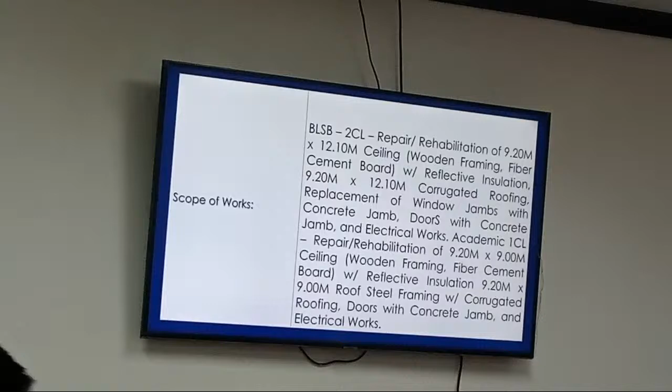1,856,797 pesos and 80 centavos. Contract duration: 45 calendar days. 2023, so it's correct. 2023. BEFF 2023.

Scope of works: BLSB-2 classroom, repair or rehabilitation of 9.2 meters by 12.10 meters ceiling, wooden framing, fiber cement board with reflective insulation, 9.2 meters by 12.10 meters corrugated roofing, replacement of window jambs with concrete jamb, doors with concrete jamb, and electrical works. Academic 1 classroom: repair rehabilitation of 9.2 meters by 9 meters ceiling, wooden framing, fiber cement board with reflective insulation, 9.2 meters by 9 meters, steel framing with corrugated roofing, doors with concrete jamb and electrical works.

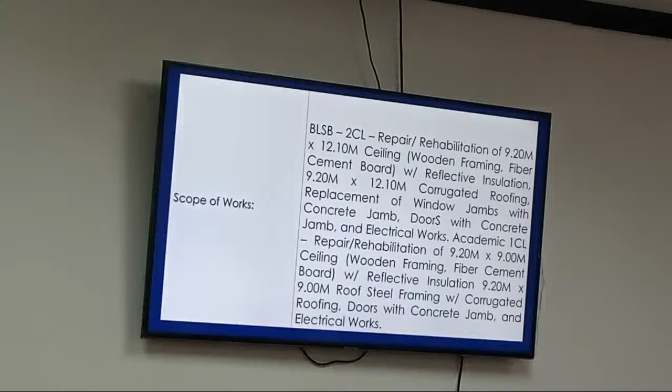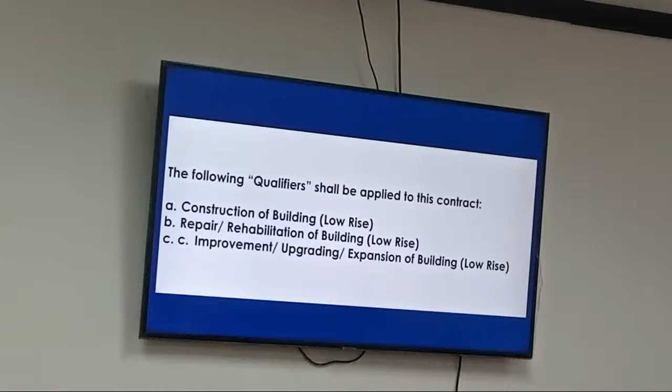The following qualifiers shall be applied to this contract: A, construction of building, low-rise; B, repair or rehabilitation of building, low-rise; C, improvement or upgrading or expansion of building, low-rise.

List of key personnel: Project manager, minimum years of similar experience in position 5 years, minimum years of total work experience in position 5 years. Project engineer, minimum years of similar experience in position 3 years, minimum years of total work experience in position 3 years. Materials engineer, minimum years of similar experience in position 3 years, minimum years of total work experience in position 3 years. Construction foreman, minimum years of similar experience in position 2 years, minimum years of total work experience in position 2 years. Construction safety health personnel needs certificate of training.

So let's proceed to the list of key equipment units: description, capacity, and required units. Cutting outfit, required unit is 1. Bending machine, electric driven or DC output, required unit is 1.

As per DO number 11 series of 2017, laboratory equipment is required and mandatory. Equipment capacity and required units as specified in the bid data sheet shall be mandatory, and the absence of the same shall disqualify the contractor. So, any question or clarification for 23FC0140? Let's proceed to another contract.

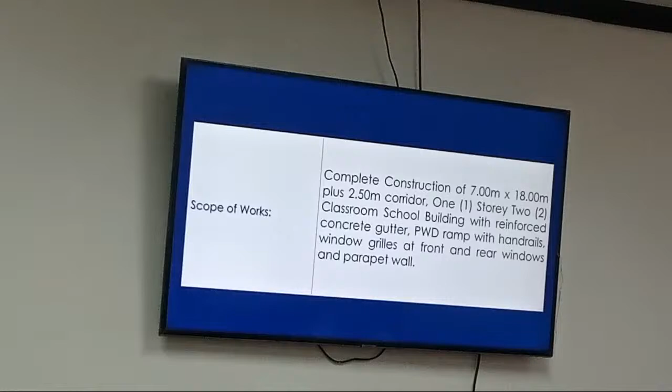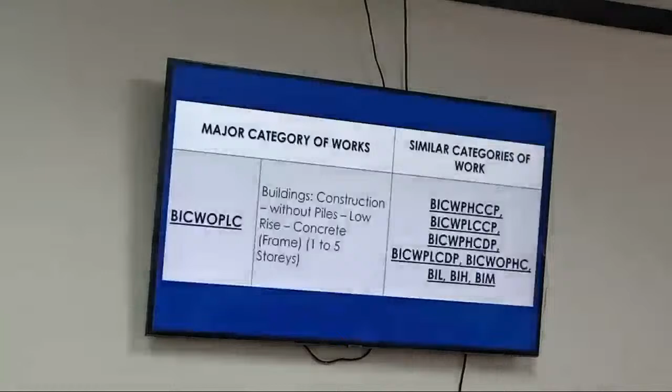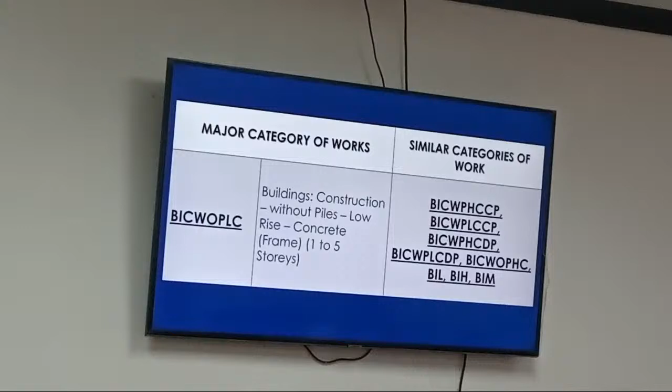Similar category: BICW PH CCP, BICW PL CCP, BICW PH CDP, BICW PL CDP, BICW OPH C, BIL, BIH, and BIM. The following qualifiers shall be applied to this contract: A, construction of building low-rise; B, repair or rehabilitation of building low-rise; C, improvement or upgrading or expansion of building low-rise.

List of key personnel. Project manager: minimum years of similar experience in position, 5 years; minimum years of total experience in position, 5 years. Project engineer: minimum years of similar experience in position, 3 years; minimum years of total experience in position, 3 years.

Materials engineer: minimum years of similar experience in position, 3 years; minimum years of total experience in position, 3 years. Construction foreman: minimum years of similar experience in position, 2 years; minimum years of total work experience in position, 2 years. Construction safety health personnel need certificate of training from DOLE.

Let's proceed to the list of key equipment units for this project. Description, capacity, and the required units. Backhoe, capacity 0.8 cubic meter, required unit 1. Barbender, required unit 1. Barcutter, required unit 1. Cutting outfit, required unit 1.

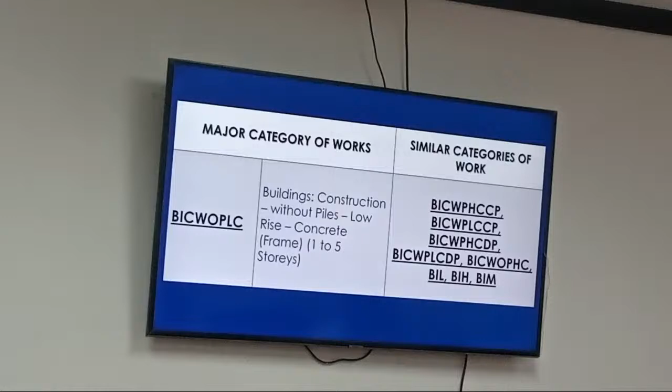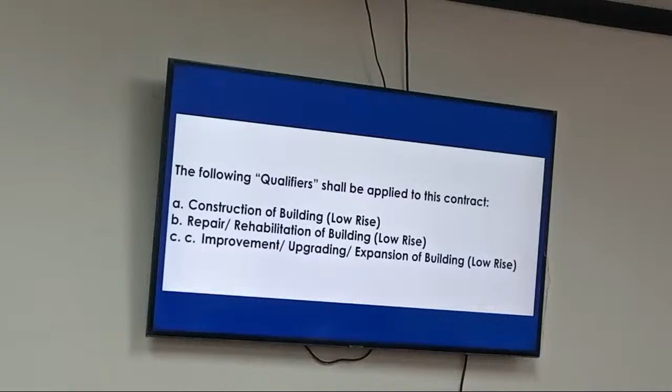The following qualifiers shall be applied to this contract: A. Construction of building, low-rise. B. Repair or rehabilitation of building, low-rise. C. Improvement or upgrading or expansion of building, low-rise.

List of key personnel. Project manager: minimum years of similar experience in position, 5 years; minimum years of total work experience in position, 5 years. Project engineer: minimum years of similar experience in position, 3 years.

Minimum years of total work experience in position, 3 years. Materials engineer: minimum years of similar experience in position, 3 years; minimum years of total work experience in position, 3 years. Construction foreman: minimum years of similar experience in position, 2 years; minimum years of total work experience in position, 2 years. Construction safety health personnel need certificate of training from DOLE.

Let's proceed to the list of key equipment units for this project. Description, capacity, and required units. Backhoe, capacity 0.8 cubic meter, required unit 1. Bar bender, required unit 1. Bar cutter, required unit 1. Cutting outfit, required unit 1. Dump truck, capacity 12 cubic yard, required unit 2.

Welding machine, capacity 500 amperes, required unit 1. Jackhammer, required unit 1. One bagger mixer, capacity 4 to 6 cubic feet per minute, required unit 1. Plate compactor, required unit 1.

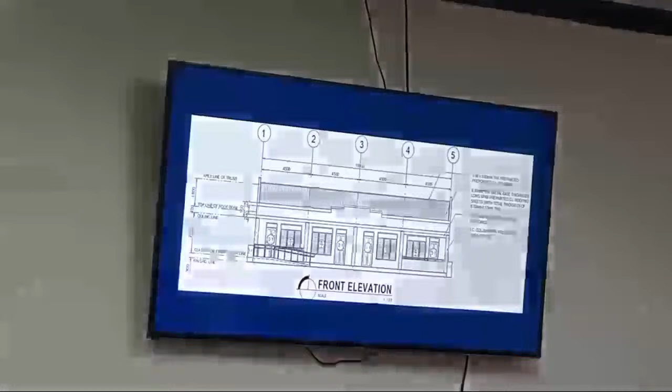So we have the perspective, the front elevation, and the floor plan. Let's proceed to the major categories of work.

BICW OPLC, building construction without piles, low-rise, concrete frame, 1 to 5 stories. Similar categories of work: BICW PHCCP, BICW PLCCP, BICW PHCDP, BICW PLCDP, BICW OPHC, BIL, BIH, and BIM.

The following qualifiers shall be applied to this contract: A. Construction of building, low-rise. B. Repair, rehabilitation of building, low-rise. C. Improvement or upgrading or expansion of building, low-rise.

Proceed to the list of key personnel. Project manager: minimum years of similar experience in position, 5 years. Minimum years of total work experience in position, 5 years.

Project engineer: minimum years of similar experience in position, 3 years. Minimum years of total work experience in position, 3 years. Materials engineer: minimum years of similar experience in position, 3 years. Minimum years of total work experience in position, 3 years.

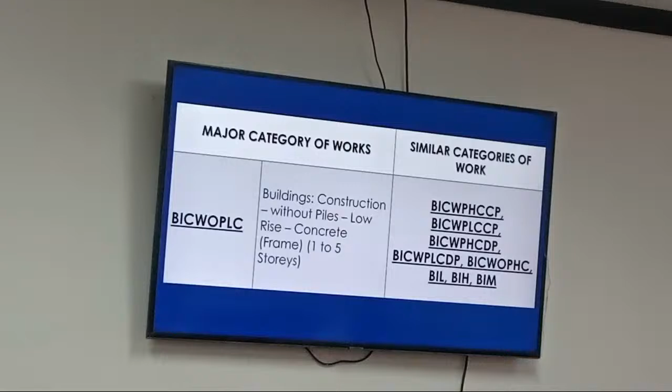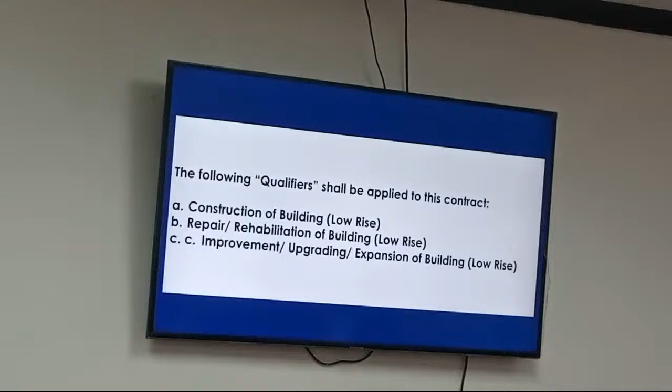The following qualifiers shall apply to this contract: A. Construction of building, low-rise. B. Repair or rehabilitation of building, low-rise. C. Improvement or upgrading or expansion of building, low-rise.

Let's proceed to the list of key personnel. Project manager: minimum years of similar experience in position, 5 years. Minimum years of total work experience in position, 5 years.

Project engineer: minimum years of similar experience in position, 3 years. Minimum years of total work experience in position, 3 years. Materials engineer: minimum years of similar experience in position, 3 years. Minimum years of total work experience in position, 3 years.

Construction foreman: minimum years of similar experience in position, 3 years. Minimum years of total work experience in position, 3 years. Construction safety and health personnel need certificate of training from DOLE.

Let's proceed to the list of key equipment units for the project: description, capacity, and required units. Backhoe: capacity 0.8 cubic meter, required unit 1.

Bar bender, required unit 1. Bar cutter, required unit 1. Cutting outfit, required unit 1. Dump truck: capacity 12 cubic yard, required unit 2. Welding machine: capacity 500 amperes, required unit 1. Jackhammer, required unit 1.

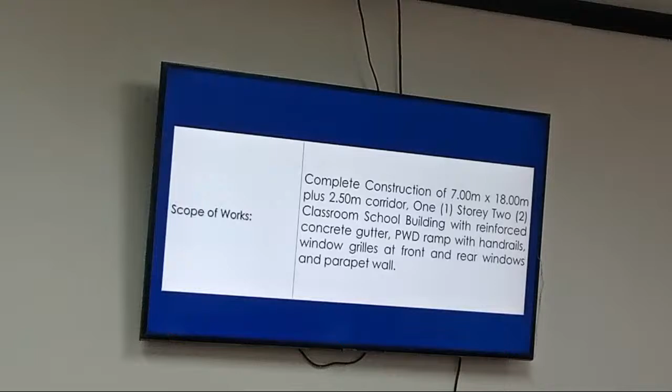So we have the perspective, the front elevation, and the floor plan.

The major categories of work: BICW, OPLC, building construction without piles, low-rise, concrete frame, 1 to 5 stories. Similar categories of work: BICW PH CCP, BICW PL CCP, BICW PH CDP, BICW PL CDP, BICW OPHC, BIL, BIH, and BIM.

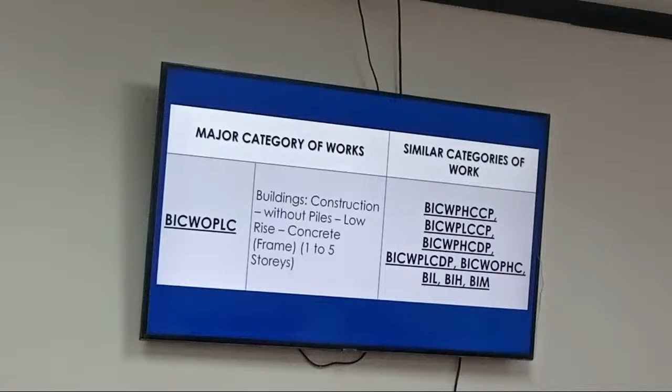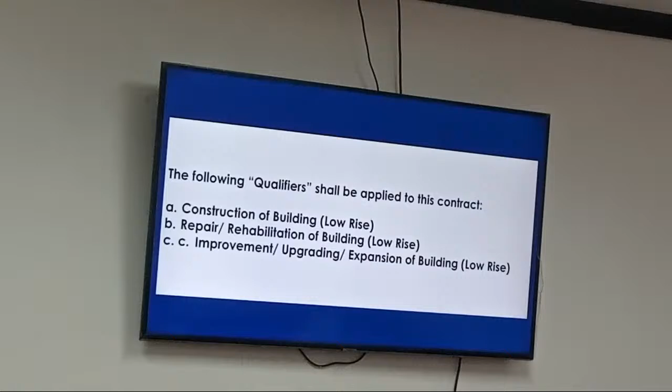The following qualifiers shall be applied to this contract: A. Construction of building, low-rise. B. Repair, construction, repair or rehabilitation of building, low-rise. C. Improvement, upgrading, or expansion of building, low-rise.

List of key personnel: Project manager, minimum years of similar experience in position 5 years, minimum years of total work experience 5 years. Project engineer, minimum years of similar experience 3 years,

minimum years of total work experience 3 years. Materials engineer, minimum years of similar experience 3 years, minimum years of total work experience 3 years. Construction foreman, minimum years of similar experience 2 years, minimum years of total work experience 2 years. Construction safety health personnel need a certificate of training from DOLE.

Let's proceed to the list of key equipment for the project: description, capacity, and required units. Backhoe, capacity 0.8 cubic meter, required unit 1. Bar bender, required unit 1. Bar cutter, required unit 1. Cutting outfit, required unit 1. Dump truck, capacity 12 cubic yard, required unit 2.

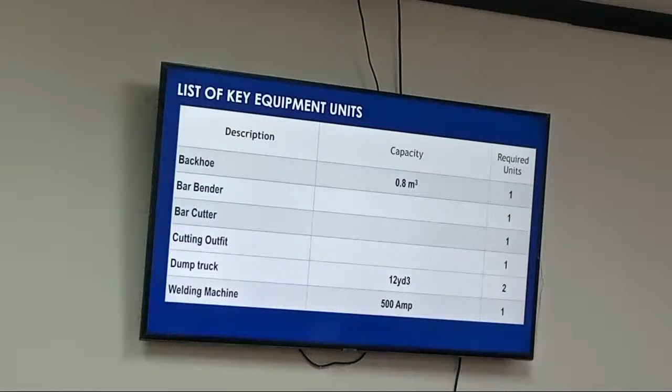Welding machine, capacity 500 amperes, required unit 1. Jackhammer, required unit 1. One bagger mixer, capacity 4 to 6 cubic feet per minute, required unit 1. Plate compactor, required unit 1.

As per DO number 11, series of 2017, laboratory equipment is required and mandatory. Note: equipment capacity and required unit as specified in the review sheet shall be mandatory, and absence of the same shall disqualify the contractor.

Any questions or clarifications for 24FC0054? If none,

let's proceed to contract ID number 24FC0055. Contract name: completion of Barangay Old Camp, Farm-to-Market Road, Capalonga, Camarines Norte.

Okay na po guys. See? Okay.

Contract location: Barangay Old Camp, Capalonga, Camarines Norte. Implementing office: DPWH CNDO Construction Section. Funding source: FY 2024 Department of Agriculture. Approved budget for the contract is 15,919,999 pesos and 70 centavos, with a contract duration of 122 calendar days to complete the project.

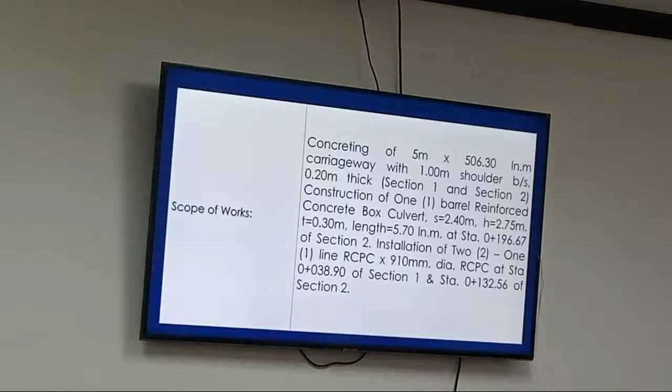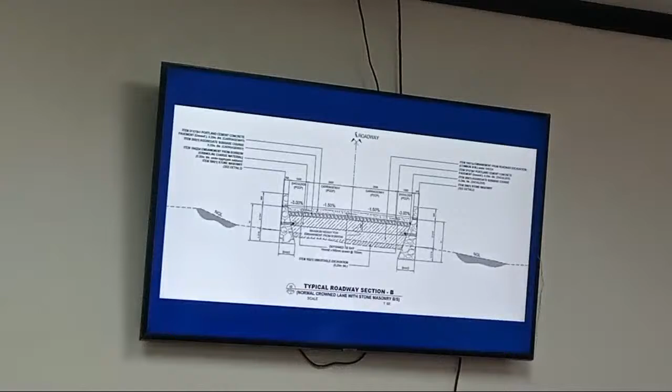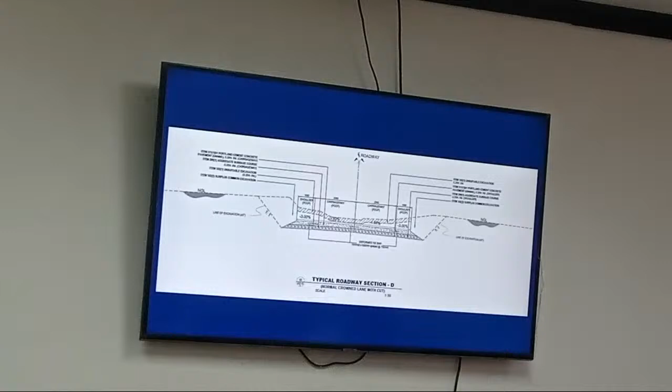We have the vicinity map, typical roadway section A, typical roadway section B, typical roadway section C, typical roadway section D, typical roadway section E, typical roadway section F.

Major categories of work: RCP, road construction, PCCP. Similar categories of work: RRP and RCTP. The following qualifiers shall be applied to this contract: must have complete reconstruction and reblocking, including base course, covering 50% of the item of work of the project. May include airport, runways, taxiways, and aprons.

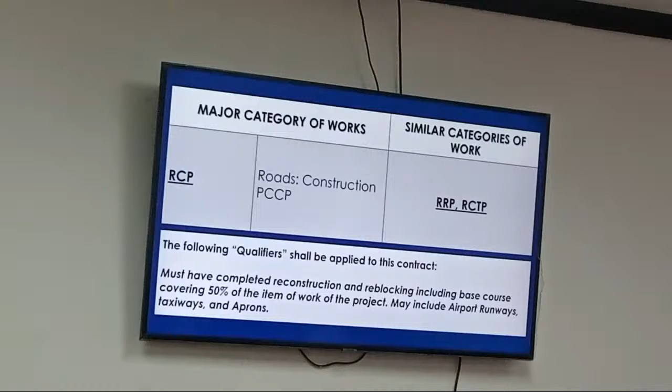List of key personnel: Project manager, minimum years of similar experience 5 years, minimum years of total work experience 5 years. Project engineer, minimum years of similar experience 3 years, minimum years of total work experience 3 years. Materials engineer, minimum years of similar experience 3 years, minimum years of total work experience 3 years. Construction foreman, minimum years of similar experience 2 years, minimum years of total work experience 2 years. Construction safety health personnel need a certificate of training from DOLE.

So let's proceed to the list of key equipment units for the project: description, capacity, and required units. Service vehicle, pick-up type, capacity 4x4, required unit 1.

Tower lights, tower height equals 28 feet, number of lights equals 4 by 1,000 watts with generator equals 5 kilowatts. The capacity is 10.5 horsepower and the required unit is 1.

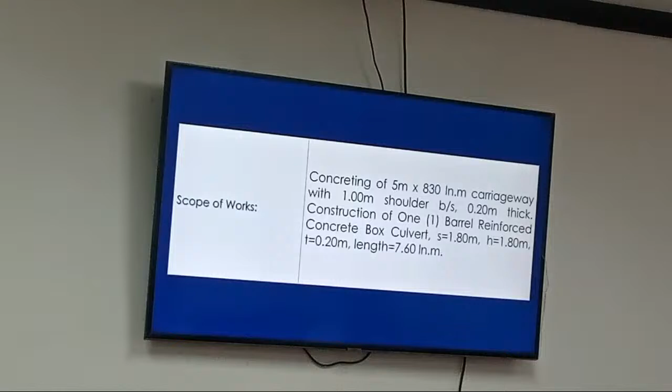So for the major categories of work: RCP, road construction, PCCP, similar categories of work, RRP, and RCTP. The following qualifiers shall be applied to this contract: must have complete reconstruction and reblocking, including base course, covering 50% of the item of work of the project. May include airports, runways, and taxiways.

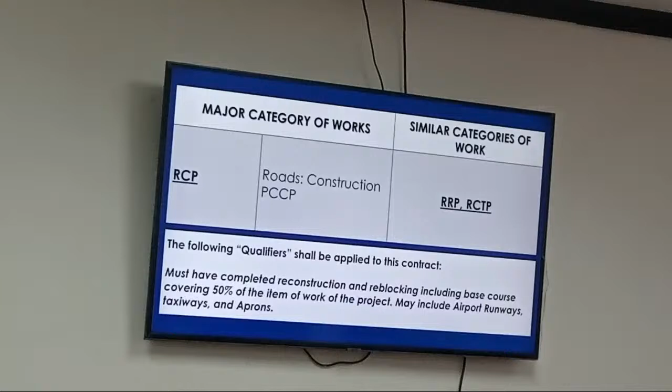So let's proceed to the list of key personnel. Project manager, minimum years of similar experience in position 5 years, minimum years of total work experience in position 5 years. Project engineer, minimum years of similar experience in position 3 years, minimum years of total work experience in position 3 years.

Materials engineer, minimum years of similar experience in position 3 years, minimum years of total work experience in position 3 years.

Construction foreman, minimum years of similar experience in position 2 years, minimum years of total work experience in position 2 years. Construction safety and health personnel need certificate of training from DOLE.

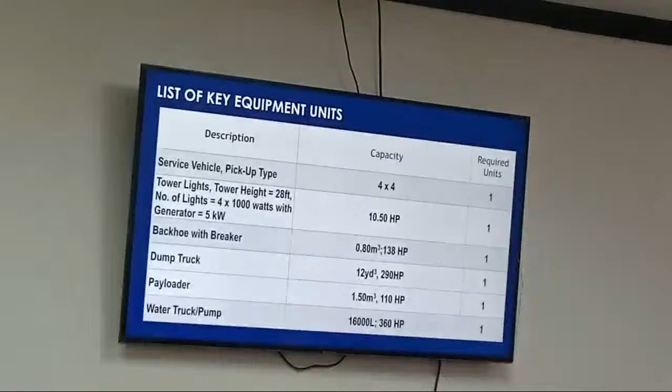So let's proceed to the list of key equipment units for the project, with the capacity and the required units. Service vehicle, pick-up type, capacity is 4x4, required unit is 1.

Tower lights, tower height equals 28 feet, number of lights equals 4 by 1,000 watts with generator equals 5 kilowatts. The capacity is 10.5 horsepower and the required unit is 1.

Backhoe with breaker. The capacity is 0.80 cubic meter and 138 horsepower. The required unit is 1.

Dump truck. The capacity is 12 cubic yard and 290 horsepower. The required unit is 1.

Payloader. The capacity is 1.5 cubic meter and 110 horsepower, required unit is 1. Water truck or pump, the capacity is 16,000 liters and 360 horsepower, the required unit is 1.

Motorized road grader, capacity 140 horsepower, required unit is 1. Vibratory roller, capacity 10 metric ton and 124 horsepower, required unit is 1. Transit mixer, capacity 5 cubic meter and 175 horsepower, required unit is 4.

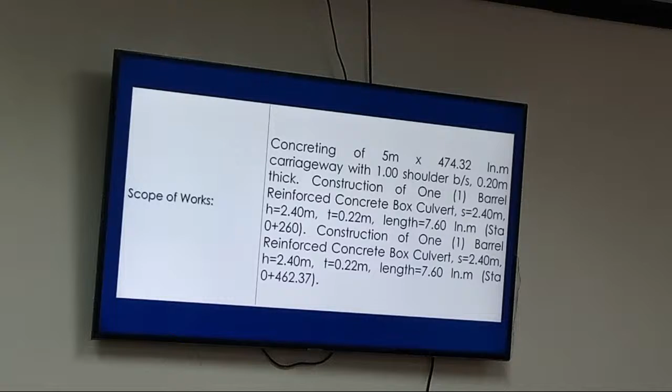Station 0 plus 260: construction of 1 barrel reinforced concrete box culvert, S equals 2.4 meters, H equals 2.4 meters, T equals 0.22 meter, length equals 7.6 linear meter. And the station of 0 plus 462.37 meters.

Let's proceed to the major categories of work: RCP, road construction, PCCP. Similar categories of work: RRP and RCTP. The following qualifiers shall be applied to this contract: must have completed reconstruction and reblocking, including base course, covering 50% of the item of work of the project. The project may include airport runways, taxiways, and aprons.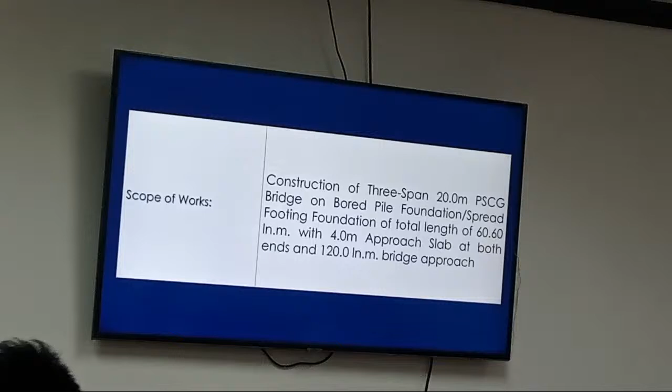Scope of works: construction of a 3-span, 20-meter pre-stressed concrete girder bridge on bored pile foundation or spread footing foundation, total length of 60.6 meters, with 4-meter approach slab at both ends and 120-meter bridge approach.

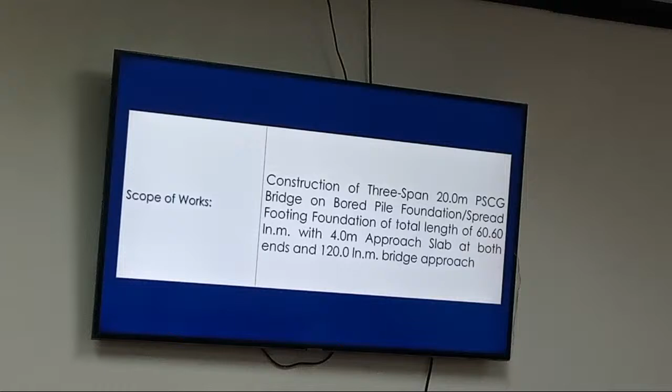Major category support or similar category support, BCCP, bridge construction concrete superstructure with cast in place piles. Similar category support: BRH CCP, BRI CCP, BCP, BRP, BRC, BCC, and BRR. The following qualifiers shall be applied to this contract: must include major structural components of both substructure and superstructure, example piles, girder, truss members, comprising at least 20% of the item of work of the project.

List of key personnel. Project manager, minimum years of similar experience in position 5 years, minimum years of total experience in position 5 years. Project engineer, minimum years of similar experience in position 3 years, minimum years of total experience in position 3 years. Construction foreman, minimum years of similar experience in position 2 years, minimum years of total experience in position 2 years. Construction safety health personnel, need certificate of training.

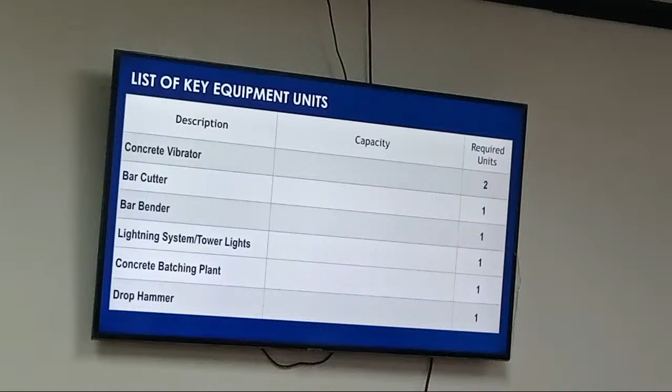As per DO number 11, series of 2017, laboratory equipment is required and mandatory. Equipment capacity in the required units as specified in the bid data sheet shall be mandatory, and absence of the same shall disqualify the contractor.

So any question or clarification for 24FC0058? If none...

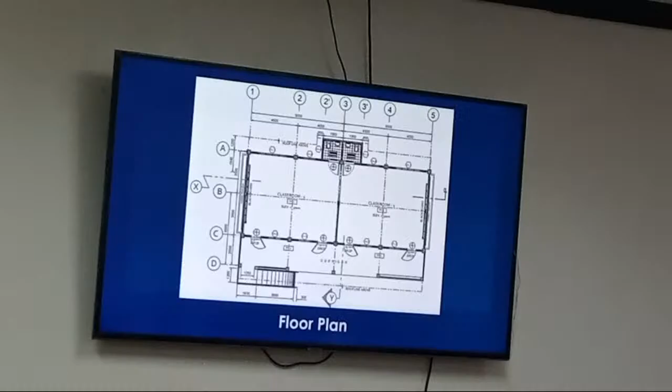Let's proceed to the schedule of key procurement activity for 24FC0140, 24FC0050, 24FC0054, and 24FC0058.

Activity, time, and place. Issuance and downloading of bidding documents: March 22, 2024 to April 16, 2024. Place: hard copies at the BAC Secretariat of DPWH Camarines Norte DEO. Downloading from DPWH website www.dpwh.gov.ph and/or PhilGEPS website.

www.philgeps.gov.ph. Pre-bid conference today at 10 a.m. on April 1, 2024, Conference Hall, DPWH CNDO, Camarines Norte. Receipt of bids, opening of bids, and preliminary evaluation of bids scheduled on April 16, 2024 until 10 a.m., Conference Hall, DPWH CNDO, Camarines Norte.